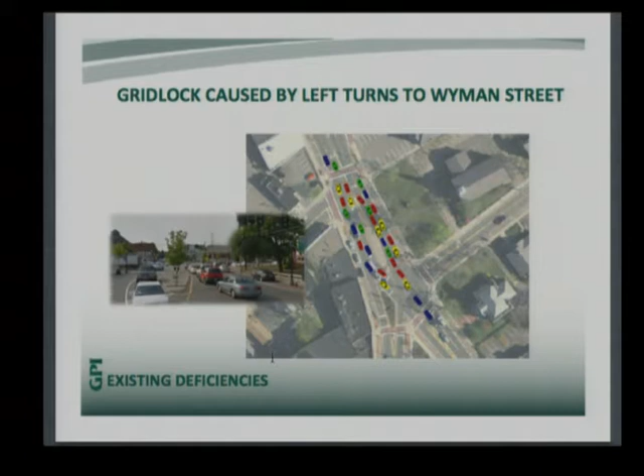The first deficiency would be the gridlock caused by left turns to Wyman Street. I'm sure everybody is familiar with this. This causes significant backups and queuing of vehicles into and beyond the southern intersection. Since the Town Square experiences heavy congestion, it often takes vehicles a long time to execute a left turn. Currently, there's signage to restrict left turns during peak hours, but despite the signage, people still make these movements.

Another issue with the Town Square is the merging conflict for southbound approach lanes at the Washington Park and Pleasant intersection. Currently, the southern approach provides a shared left-through lane and a through lane for those executing a left on Pleasant Street or traveling southeast onto Route 27, as well as a channelized right turn lane for those continuing onto 138.

The issue is that the southern approach provides 2 departure lanes for vehicles traveling southeast on Route 27, but only 1 receiving lane, which is a liability for the town. This lane drop forces vehicles to merge quickly into the receiving lane, which is not wide enough to accommodate 2 vehicles at once and causes a huge bottleneck. This is a huge safety concern that can equate to serious accidents.

Another issue with the square is pedestrian and bicycle accommodations. First of all, there are really no bicycle accommodations, and from a pedestrian standpoint, there are no actuated signals in the center crosswalk.

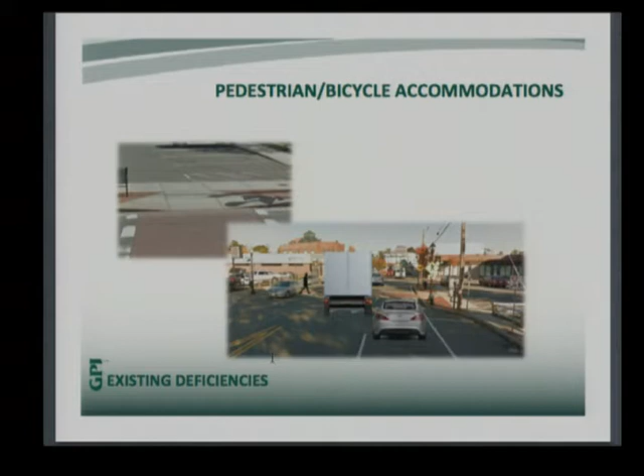Next is the Porter Street approach. If you're coming to Porter Street and you see the signalization in front of you, this approach is controlled by 2 3-section signal heads with green, yellow, and red arrow indications. Vehicles are only allowed to turn right at this approach onto Washington Street. There's a green arrow that indicates vehicles are free to turn right. Vehicles are also permitted to turn right after stopping on the red arrow phase. There is signage indicating this.

This approach confuses some drivers as they believe that the steady red arrow indicates that they are not allowed to go until they are allocated green time. This equates to moderate queuing on Porter Street at certain times during the day.

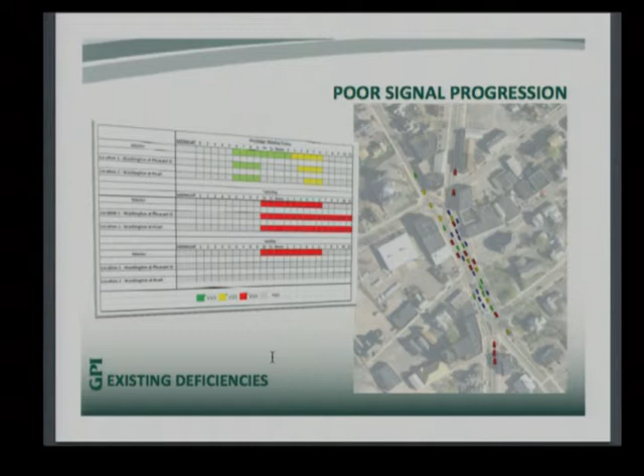Another issue with the Town Square - fortunately, there's only a few of them - is poor signal progression through the square. This essentially means the northern and southern signals aren't timed or coordinated effectively. Recently, our traffic engineers who have studied the Town Square found that the master controller box for the signals is operating in backup mode. The controller is being fixed as we speak now.

We'll get right into the possible solutions.

The project in front of the Board of Selectmen right now is to provide some immediate term improvements. Essentially, these improvements will be done for a temporary period of about 6 months, and there will be proper advertisement of these improvements.

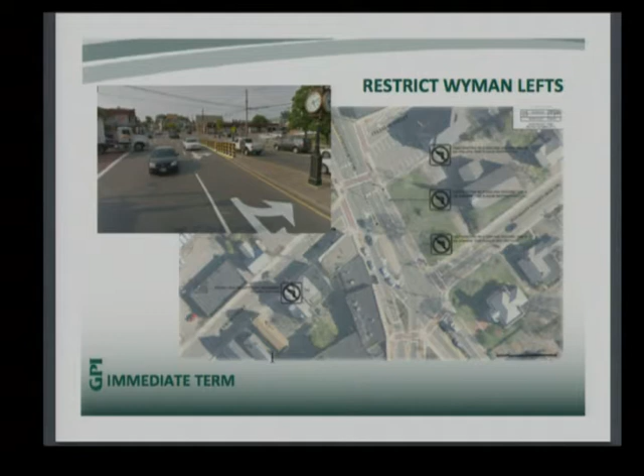So you may be asking, where do vehicles go from Wyman Street if you're restricting left turns into and out of Wyman Street? The next few slides will explain these routes.

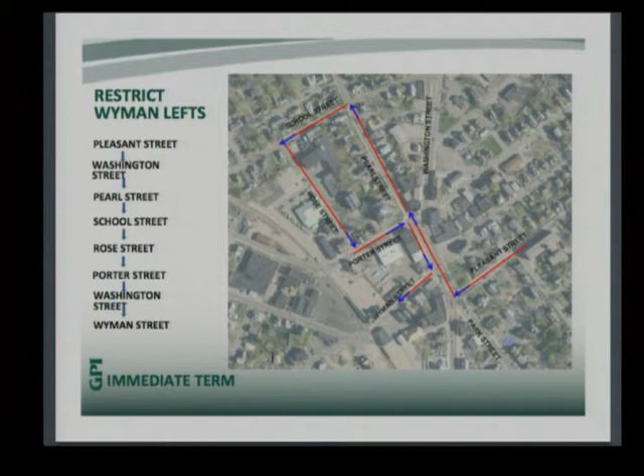This slide shows, well, how about if I drive by those two options, how else could I get there? You could drive north on Pearl Street, take a left on School Street, come down Rose Street, come down Porter Street, and then take a right on Wyman Street.

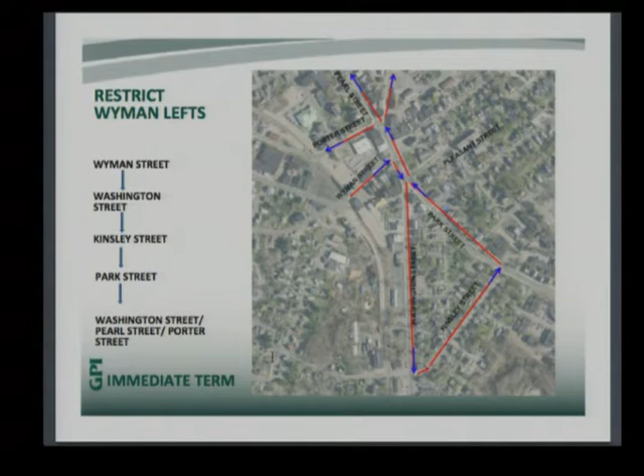This slide represents if you wanted to come north out of Wyman Street. If you wanted to take a left on Wyman Street, obviously you can't do that now under these proposed conditions. So how could you actually get north onto 138? You would take a right out of Wyman Street, come down Washington Street, take a left onto Kinsley Street, take a left onto Park Street, then travel northbound.

Another improvement that we're proposing is to provide bicycle sharrows, which are painted marks in the square, in the travel lanes. These are universal marks that denote that bicyclists will also be sharing the lanes. This is also in compliance with the town's complete street policy that they recently approved.

Another option would be keeping the red arrow the way it is, not changing it to a red ball, but adding another sign that says right turn on red arrow after stop.

The next slide is talking about improving the signal progression through the square. Essentially what we would do is optimize the existing signal timing by fixing the master control box and retiming the signal timing.

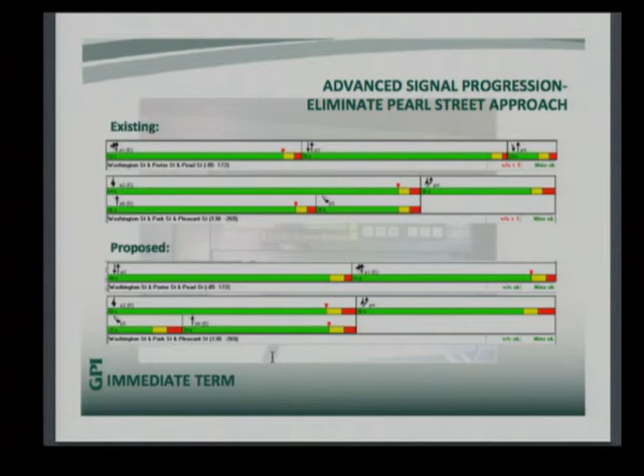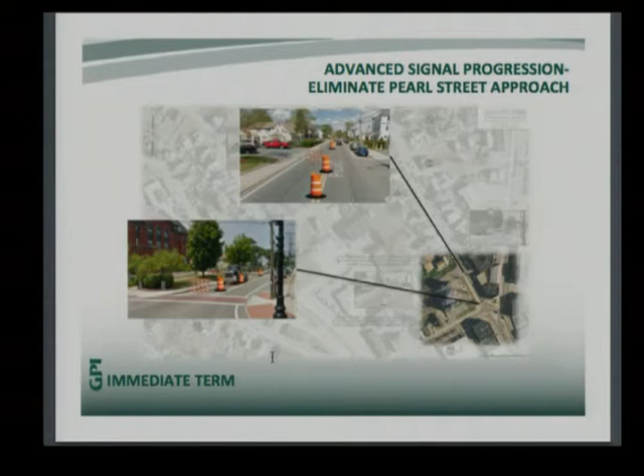The next couple slides visually show you what we could do on a temporary basis for the 6-month period on how we could cordon off the southbound lane and restrict Pearl Street to one way. Essentially, you would do this with some barricades and some barrels and some proper signage. That's the first slide, and that's the second slide showing a sign, road closed.

Now you may ask, where do I go if I'm traveling south on Pearl Street and looking to get to the square? Option 1 would be vehicles traveling south on Pearl can take a left onto School Street and then a right onto Washington Street. Option 2 would be vehicles could take a right onto School Street and travel westbound on School to Canton Street and then to Porter Street. This will increase traffic at an already dangerous intersection at Canton and School, which we all know about.

In the last 3 to 4 years, there's been 79 collisions. 50% of them have been from vehicles traveling westbound on School Street into the Canton and School Street intersection.

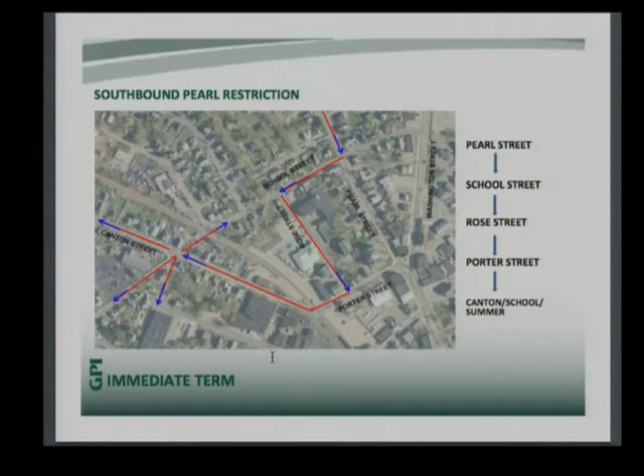Questions have been asked through this process: how do I get to Town Hall if I'm restricting Pearl Street to be one way?

The existing slide in front of you shows the existing traffic flow patterns around Town Hall. The upper drive is for the public to park around, with one-way access. The lower drive is also one-way access. Both accesses are from Pearl Street.

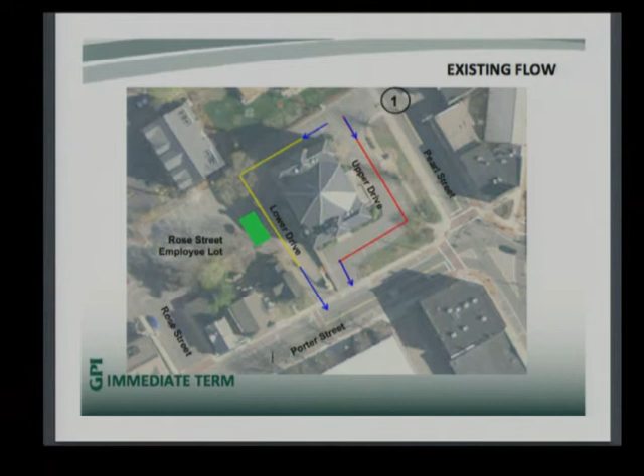On the proposed conditions, which this slide shows, you could still access the upper drive from Pearl Street, and we would be keeping the upper drive traffic flow the same. The public could still park up there, but we would be changing the flow direction of the lower drive. It's still one way, but going the opposite direction. For vehicles traveling on Porter Street, they can now access the upper drive and park in the public parking spaces.

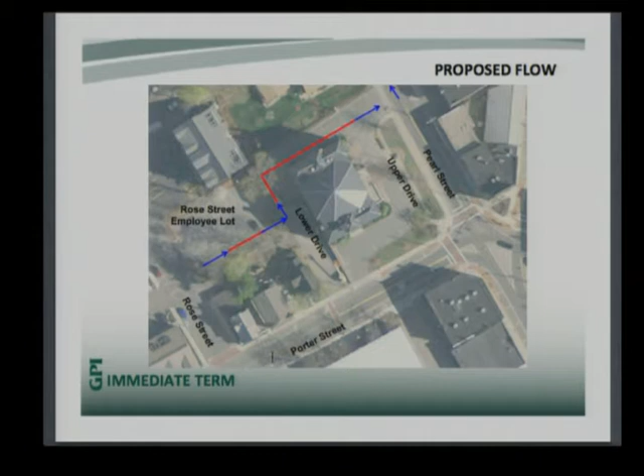Another option would be to eliminate the current bollards and the handicap spots from the center of the parking area, from the Rose Street employee parking lot area. This would improve traffic flow through the Town Hall lot. Public people could travel through the employee parking lot, travel around the Town Hall, and to the upper drive. We would obviously propose relocating the 2 handicap spots closer to the building.

The last improvement would be eliminating the merge conflict in the southern approach in the town square. We could do this very easily by just making the left-hand lane a left-only lane, and keeping the right lane a through lane. Therefore, you won't have 2 vehicles fighting to get into one lane southbound.

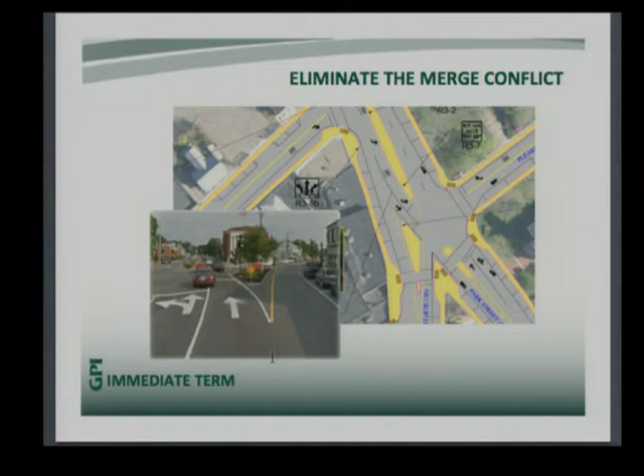So should the town find that the immediate term changes are yielding positive results, the following solutions should be considered as a more permanent feature.

As we just talked about the merge conflict, if the town saw some benefits of doing that and saw a safer situation, we can make that permanent. We would do that by going back to the Board of Selectmen after the 6-month trial period and asking for their approval to do that.

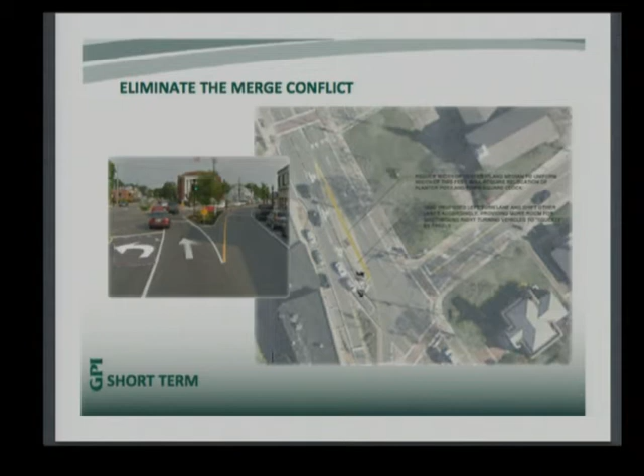By doing that, we would also request making the southern island a consistent width of 3 feet, so we would actually change the geometry of the island. This would increase the bypass lane width for vehicles traveling on 138, so they would have a better chance to get through and provide less of a queue throughout the square.

We would permanently restrict Wyman lefts. We could do this by removing the temporary lane separator system previously shown, and we could extend the southern island northerly up to the crosswalk.

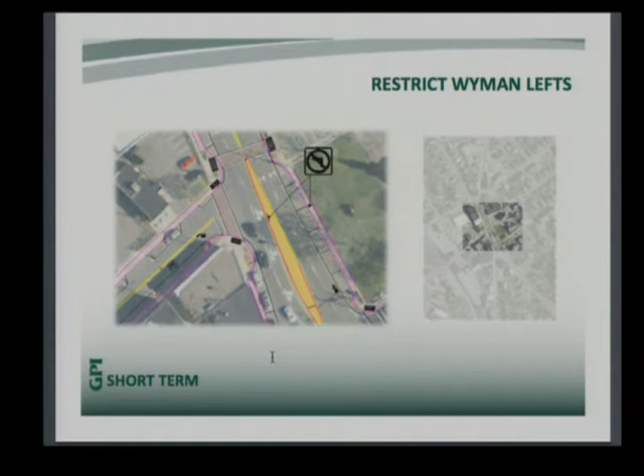To permanently improve pedestrian accommodations in the square, the center crosswalk is definitely asking for actuated pedestrian signals. Currently there are none, so somebody who wants to cross the crosswalk would hit the button and there would be a signal there to stop vehicles. It would make a much safer crossing through the square.

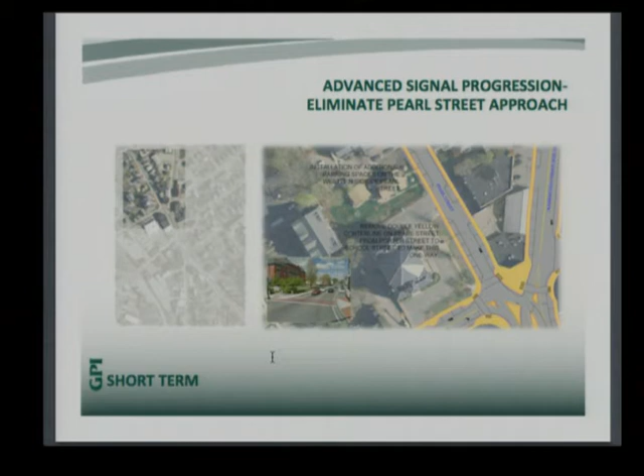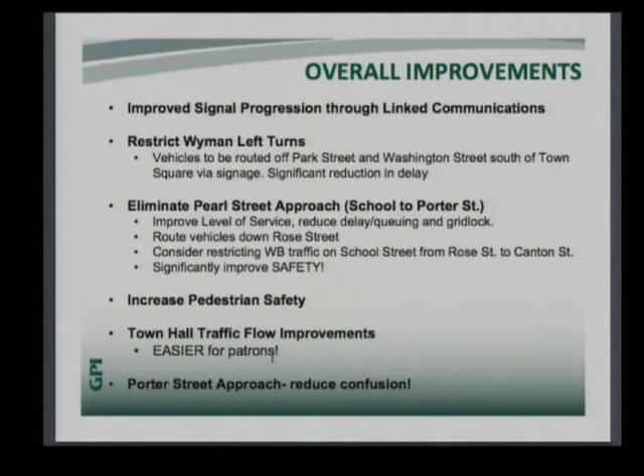This slide just summarizes what we've just talked about for the overall improvements to the town square. Please, if you have any questions at all on this project, please come into my office. I'm on the 2nd floor. I'm the town engineer, Marc Tisdelle.

Okay, now we just finished talking about the town square traffic improvements. Now we're on to the Central and Pleasant Street traffic improvements. Again, I would like to mention on March 24th, there's a public hearing with the Board of Selectmen to hear these improvements and to vote on them. If you have any opinions or comments, please come to that meeting and voice your opinion.

I'll get right into the details on the Central and Pleasant Street intersection improvements now. The first slide shows the study area. It's the Central and Pleasant Street intersection. It labels the roadways. I'm sure everybody is familiar with this area.

I'm going to get into the existing deficiencies of the intersection. The first slide shows that there's a lack of vehicle detection at the intersection. Currently, there's no vehicle detection at this intersection, and as a result, the signal is operating under pre-timed or fixed time control. A lack of detection causes the signal to continually run the designated maximum green time allotted for each phase, 30 seconds, regardless of the number of vehicles present on the approach.

This results in unnecessary delays, congestion, and increased emissions. Detection allows the control of the intersection to be efficiently allocated on a cycle-to-cycle basis and can compensate for unplanned fluctuations in traffic demand throughout the course of a day.

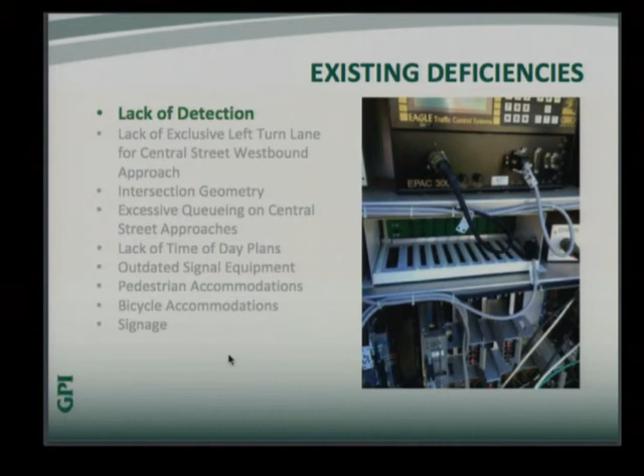The next issue is the lack of exclusive left turn lanes for the westbound approach. After conducting a left turn warrant analysis using the volumes provided by OCPC traffic counts, a left turn lane is warranted for the westbound approach.

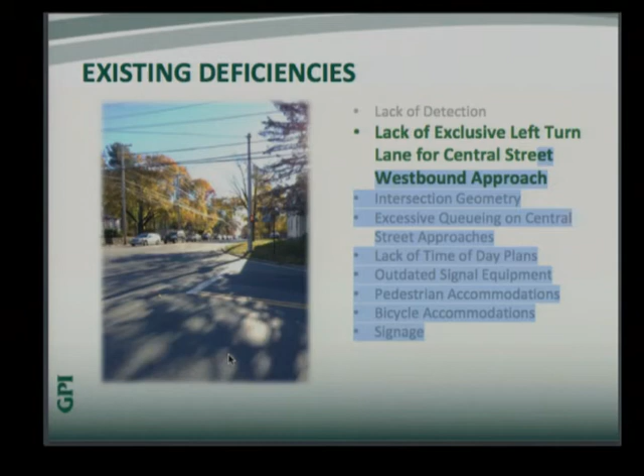Infield observations and a model of the intersection show excessive queues on the westbound approach during the AM peak period hour. This is attributed to left-turning vehicles that are unable to find a suitable gap in opposing traffic. Since there is no storage lane for these left-turning vehicles, they block the lane to through and right-turning vehicles and cause extensive backups. Extensive queuing can promote aggressive and distracted driving potential, as drivers are often waiting multiple cycles to get through the intersection.

The next issue is the intersection geometry. Central Street is a designated truck route for large vehicles trying to reach Route 27 and 138 west of the intersection, and Route 24 east of the intersection. Traffic counts conducted by the Old Colony Planning Council reported 9% heavy vehicle volume for the southbound right turn movement in the AM peak period hour.

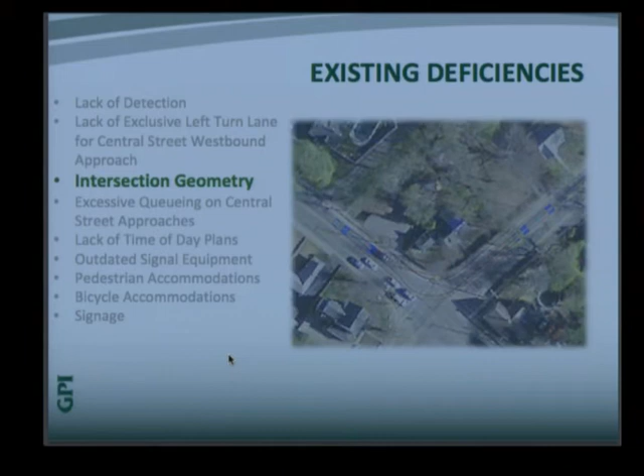During an infield site visit, it was observed that the trucks and heavy vehicles have a difficult time executing the southbound right turn from Pleasant Street to westbound Central Street due to the existing tight curb radius in the northwest corner of the intersection. It was observed several times that the large vehicles will swing wide and encroach on the eastbound left turn lane on Central Street, a maneuver that could potentially cause several types of collisions, including angle, sideswipes, and possibly even head-on collisions.

Unfortunately, another deficiency is excessive queuing of vehicles on the Central Street approaches. Traffic observation shows a considerable amount of traffic executing the eastbound and westbound left turn maneuvers. During morning and evening peak periods, it is rare for both westbound and eastbound left turning vehicles to see an adequate gap in conflicting traffic.

Field observations show that at times only 1 or 2 vehicles can pass through the intersection, therefore queues for these approaches can escalate quickly. The existing permissive phasing promotes aggressive driving behaviors in which drivers frequently run the red light or immediately make the left turn as soon as the traffic light turns green. Conversation with police officials indicated this maneuver is a major cause of collisions at the intersection.

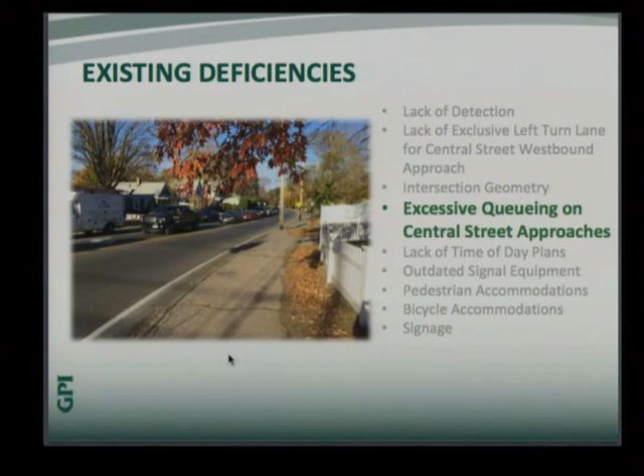The next issue is lack of time-of-day plans. The controller for these signals is currently running max green times throughout all times of the day, every day of the week. Therefore, it does not effectively serve traffic demands during the morning and evening peak periods, midday off-peak periods, and weekends and nights.

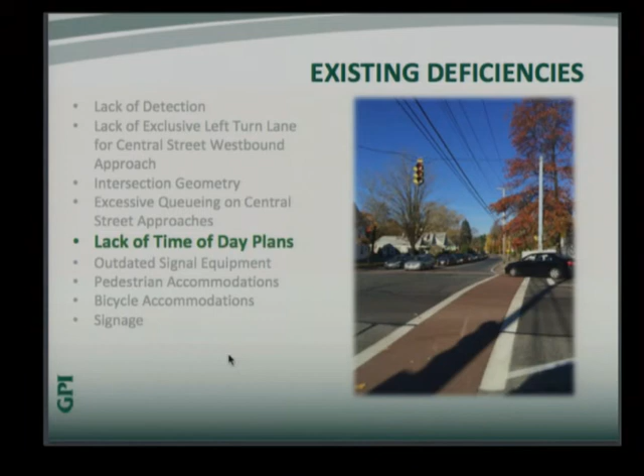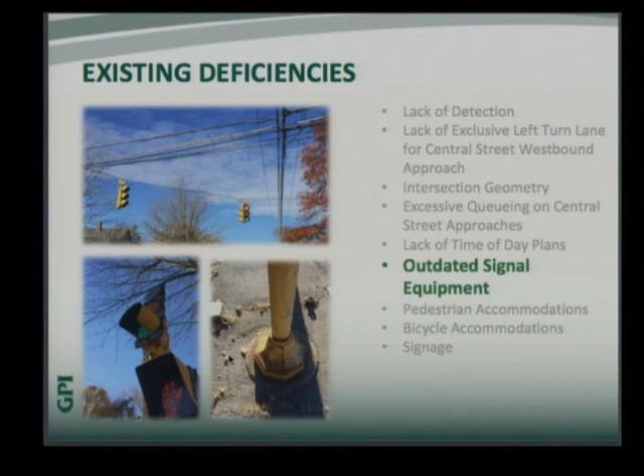Another issue with the intersection is outdated signal equipment. There's equipment missing visors, and some of the signage does not meet the state and federal requirements.

This intersection also has pedestrian accommodation issues. Some approaching sidewalks are in poor condition. The paved surface of the intersection is in fair condition. There's poor or crumbling curbing in some areas. There are utility poles and signal poles in the middle of some walkways, making it challenging for pedestrians to move. None of these pedestrian curb ramps are compliant with ADA standards, as they do not have detectable warning strips for the visually impaired. Also, the pedestrian crossing signal heads have no audio alerts, and they do not provide a countdown notifying pedestrians of safe time remaining to cross.

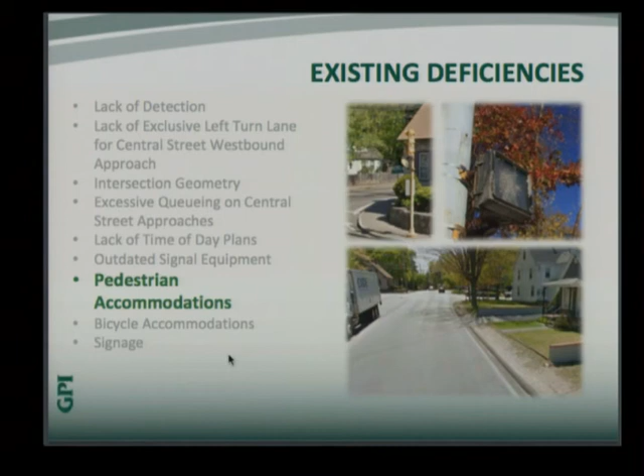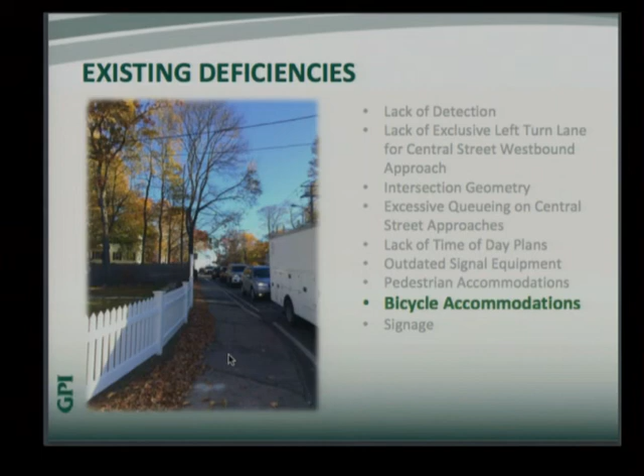Just like the town square, there are no bicycle accommodations. In order to comply with the town's complete street policies and statewide initiatives, we are proposing bicycle sharrows. Also, a lot of the signage around the intersection and at the intersection is outdated.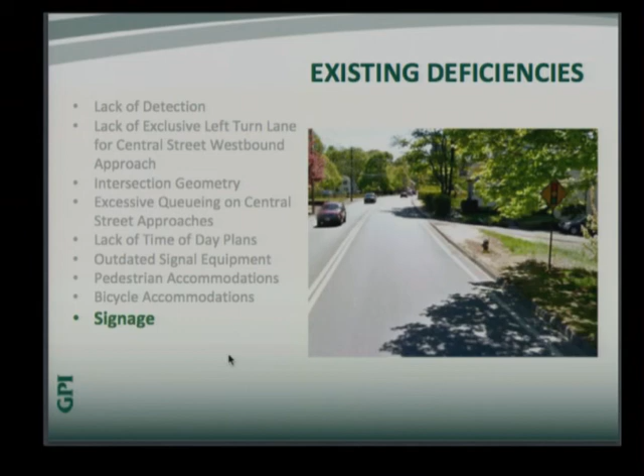The first improvement we're proposing is to improve the truck turning radius issue for trucks coming southbound on Pleasant Street and turning right onto Central Street. We are proposing to push back the stop bar by 20 feet on the eastbound approach on Central Street. We will adjust the pavement markings accordingly. This plan shows the proposed improvement.

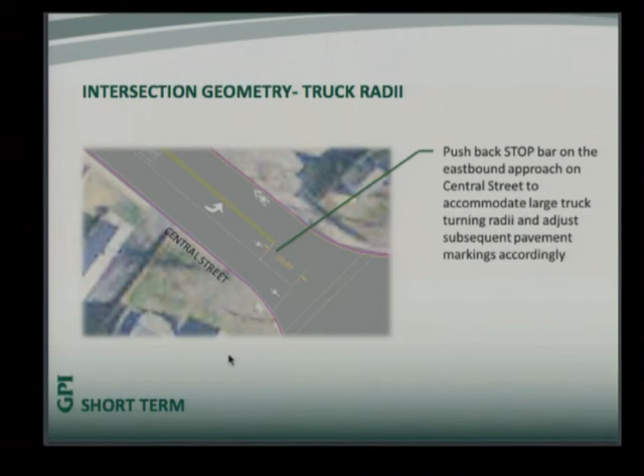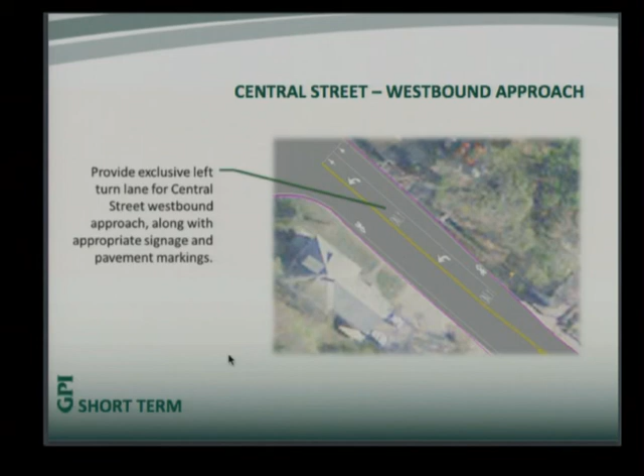The second improvement we're looking to do is add an exclusive left turn lane for the Central Street westbound approach, along with appropriate signage and pavement markings. This will improve the level of service, the volume-to-capacity ratio, and the overall intersection delay.

Another improvement, as we previously talked about, is improving all the signs and adding bicycle sharrows to make drivers aware that bicycles also share the road.

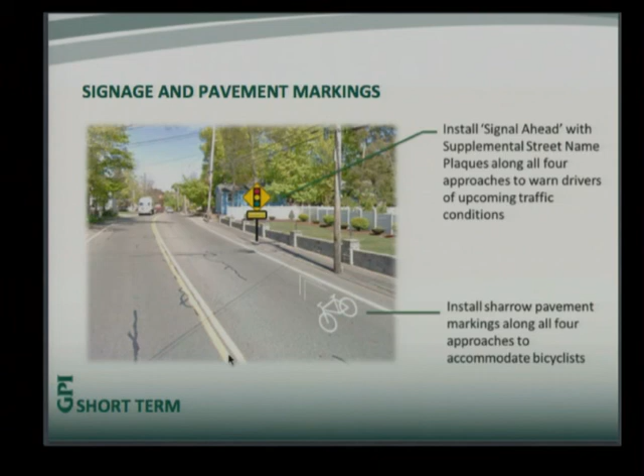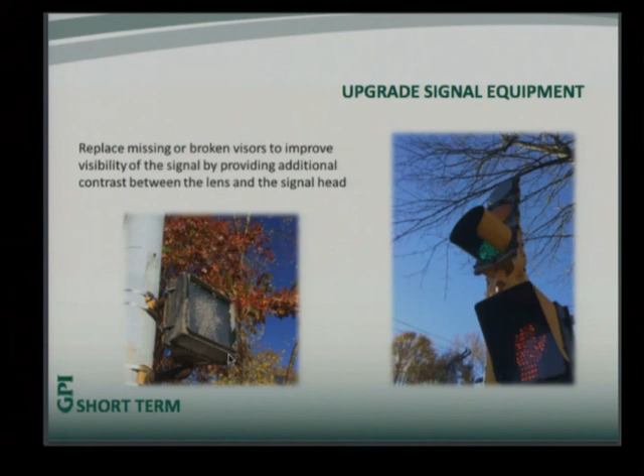Another improvement would be upgrading the signal equipment, replacing the visors, and the long-term improvements would be to actually upgrade the actuated signals so they have audio alerts and countdowns.

We also will be talking about upgrading the signal intelligence. We will have our traffic engineers implement new timings and time-of-day plans to better serve AM and PM periods while there is still no detection. This will cut down unnecessary queuing and equate to a better level of service.

In my opinion, the best upgrade to the intersection and the best bang for your buck is to install a video detection system. Detection allows the control of the intersection, green times, to be efficiently allocated on a cycle-to-cycle basis and can compensate for unplanned fluctuations in traffic demand throughout the day.

For instance, the current intersection has preset timing, and if there were no vehicles waiting at one approach, then the light would stay green for the full 30 seconds. Detection will switch the green time to an approach that needs it.

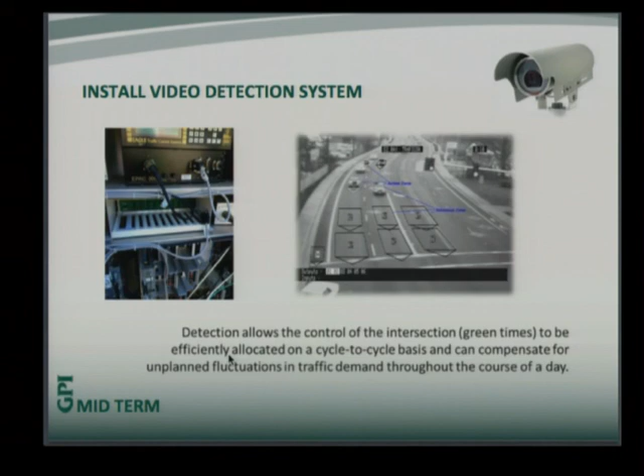By adding the dedicated left turn lanes, we would also install new signal heads for the eastbound and westbound left turn lanes. These signal heads will have the standard left turn green arrow that you typically see.

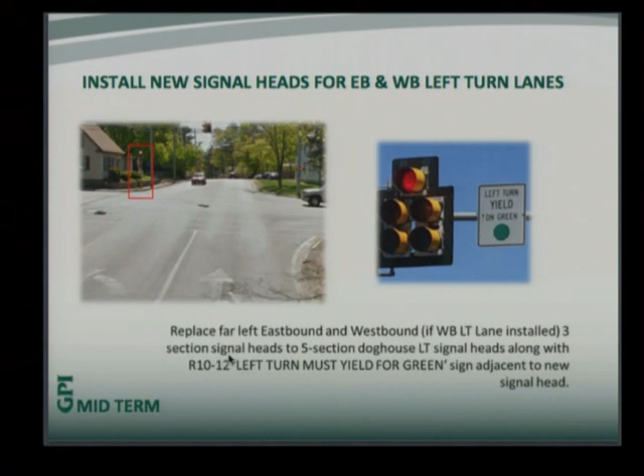In conjunction with installing the dedicated left turn lanes going eastbound and westbound on Central Street, we will be installing new 5-section signal heads as I just discussed. But we will also be upgrading the signal intelligence to accommodate for the left turn green arrows.

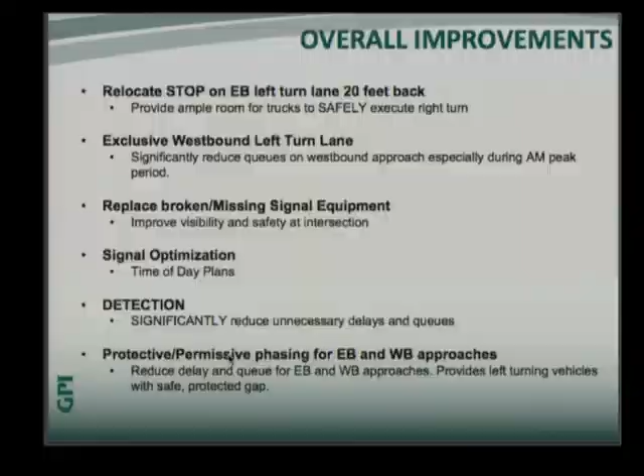This slide pretty much summarizes what we just talked about for the improvements. Again, there will be a much more detailed presentation at the Board of Selectmen meeting on March 24th, explaining all the details of this presentation. There will actually be moving models and simulation that our traffic engineers have prepared. I urge you to certainly come to the meeting and voice your opinion, as some of these changes will make a big impact in the town. Thank you very much.